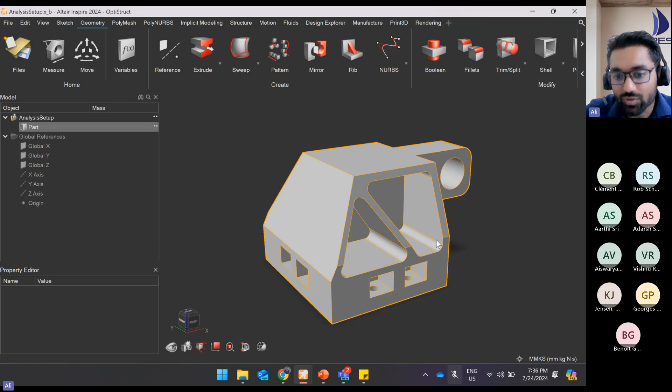And that might take a lot of time to go back and forth. So within Inspire, you have a few tools wherein you can play around with the geometry. Here I have the geometry tool on top, as you can see. We have various operations that you have in your traditional CAD interface, and you can use these to simplify your model. So here, as Ben mentioned, this is a part of an aeroplane, and we need to simulate this and even check it for optimization.

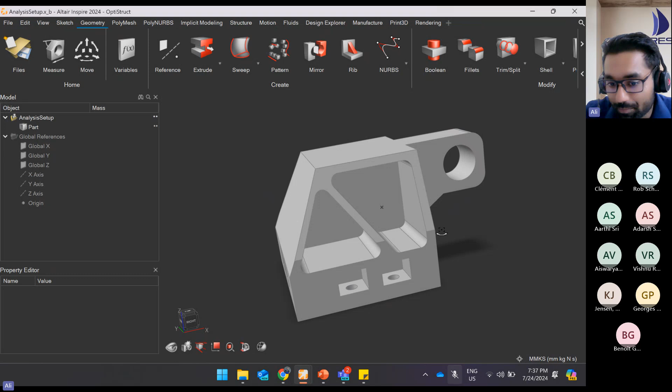And the initial part will be to just simplify the geometry. The reason we simplify the geometry for optimization is so that we have a full packaging space wherein the software can go around and play with numbers and show us what will be the optimal shape. As you might see initially, it's made for subtractive kind of manufacturing, wherein milling operation is used and drilling operation is used. Now let me go ahead and do some simplification.

I just go in here. We have something called tool simplify. I click on it and we have multiple options to simplify. Do I have an imprint that I want to remove? All the rounds, holes, or I just want to plug the holes up.

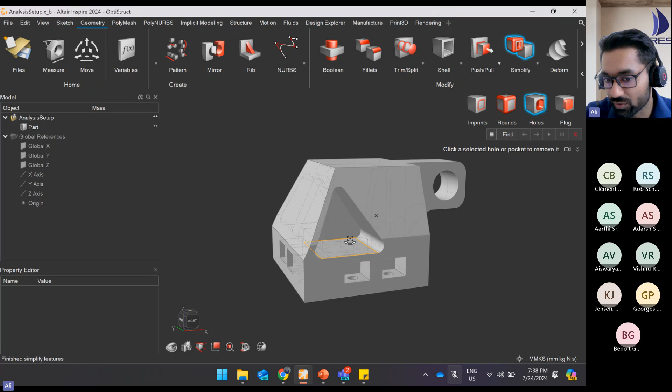In my case, currently I'm just looking to fill up these holes. So I click on holes, and the software will go around the geometry and find all the holes it can fill. Let's say I do not want to fill those holes - I just remove them and select manually. I select these holes, click OK, and it will go ahead and fill those holes for me. That easy it is to just go in and simplify the geometry.

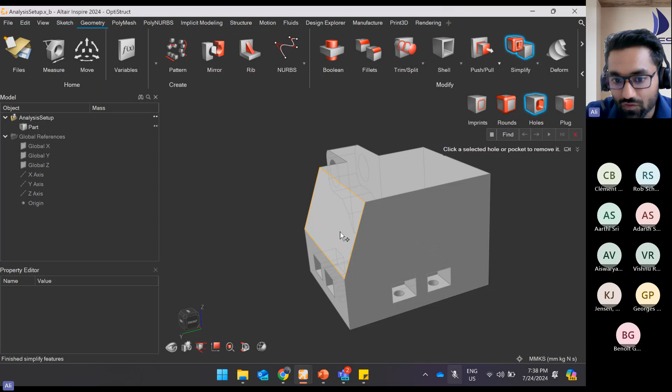Again, there are some more simplifications which we require over here. So I click in here, it will become flat. Let's say I want flat over here as well. The software is quite smart in terms of identifying what I'm looking for. Right now it's a square block, a cuboid. So here I can play around, and the software can give me an optimized shape.

Right now, once we have the simplification, we can go ahead and set up our solve for optimization. So in that case, I just need to change the toolbar from geometry to the structural toolbar that you see over here. So here we have the structure tool - you come in here and have multiple ways to set up different kinds of boundary conditions.

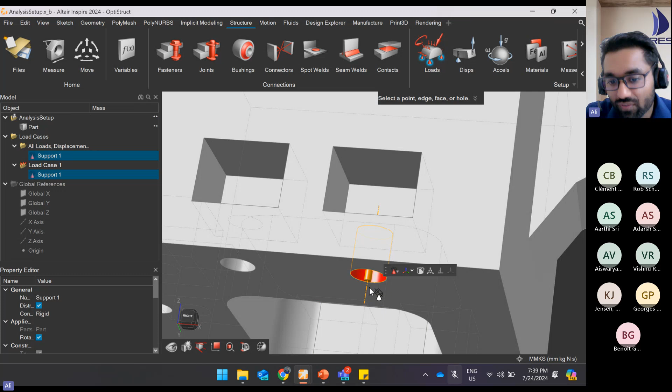But before I move on to optimization, there's something to consider - if you're optimizing a part, the software might also optimize the areas or regions where we have the boundary condition. What I mean is, let's say I have a cylindrical support at the bottom. If the software simplifies, it might remove material from one side and not from another. So I need to let the software know these are the regions where it should not remove any material.

Again, in that case, I don't need to go back to my CAD team. Within simplification, we have something called partition. It will find all the areas wherein I can make the partition. Let's say I don't want all of these - I just want a few. I select those cylinders.

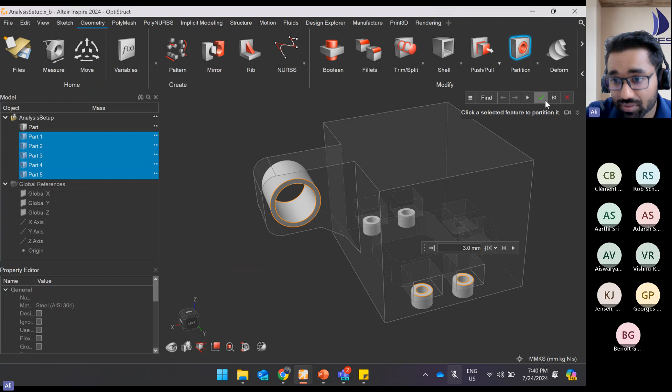And at the back side as well, just go in here and select these. And click the play button. It will show me what's the thickness that I require. Let's say 3 mm is good. I just click check mark and it will divide these components from the main component. So I can see in the structure tree, the division did happen, right?

Now I can just let the software know. So see, this is my design space. You're only bound to play around with the material only in these regions. Please don't do anything for these regions because these are where my boundary conditions are. Now we are good to start with our setup of the model.

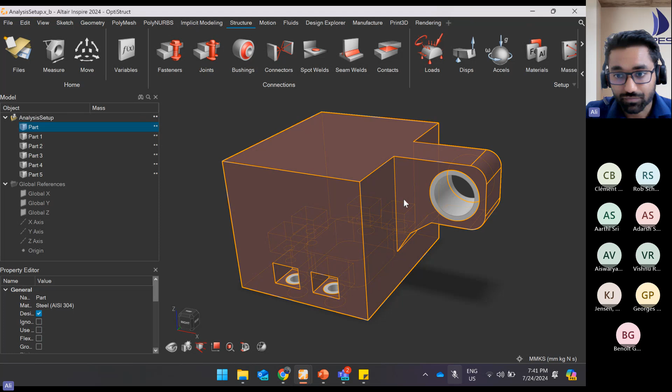Initially, I'll have some supports. Let's say I have some supports at the bottom. I just insert these supports on the 4 holes in here. And I can just move out of the tool. Right. This is the one load case. Let's say I want to have one other load case and generate another load case and also copy these supports in that very load case.

Right. Now we need to insert some kind of forces. Let's say I just want to have a force over here. Just let's say 1000 Newton, or let's say 2000 Newton for now, and click OK. This was for the load case 3rd. Let's say for load case 2 also, I'll require something in the Z direction. Let me make it 4000. Enter.

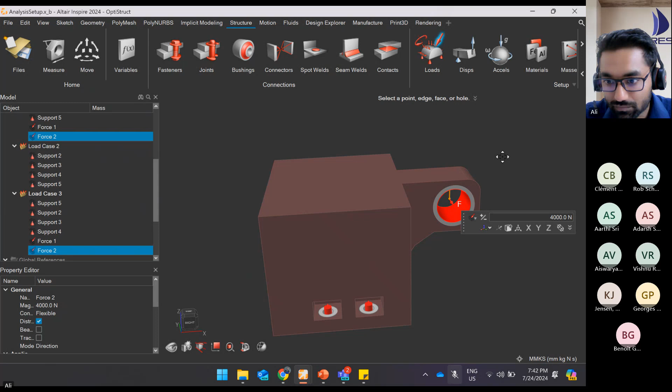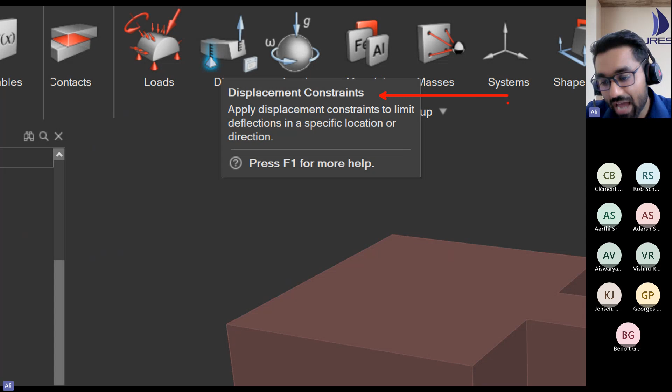Now this is the basic setup with which we are good to proceed with the optimization, right? Now within the optimization framework, we have multiple constraints that we can apply, right? So for example, we can apply something called displacement constraints, in which an edge or a surface can be mentioned that this surface shouldn't displace by this much amount. We can give a boundation for that. Right. Let's say as of now, I'm not requiring that.

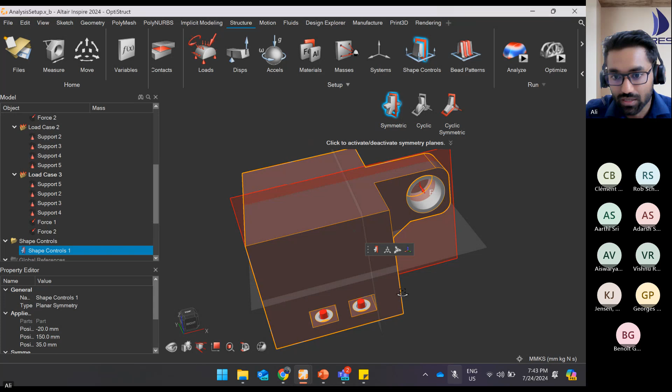I require that the part should be symmetrical in nature. So I have those kind of constraints in here. I just select the symmetry. Again, now in symmetry, we have different kinds of symmetry. We want simple symmetry or cyclic symmetry, right? Now let's say I just want symmetry. I just select the body and I can just remove the planes which I do not want the symmetry about. So once I'm good, now I can move to the next step.

As you might see, the workflow here is quite simple. We are moving from left to right, using the things which are required and using the tools that suffice our need, and we're good to move on to the next step. Now comes different kinds of optimization for manufacturing, right? So we have something called shape controls for different kinds of manufacturing processes. So depending upon what I'm looking for, I can optimize the solve accordingly. Let's say the manufacturing process that I'm using is single draw. I can have that kind of a process and optimization for that.

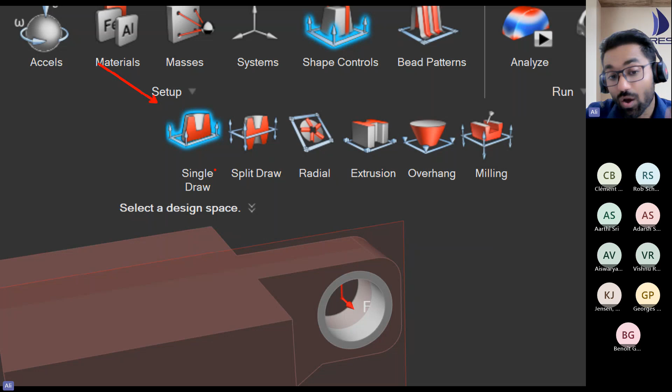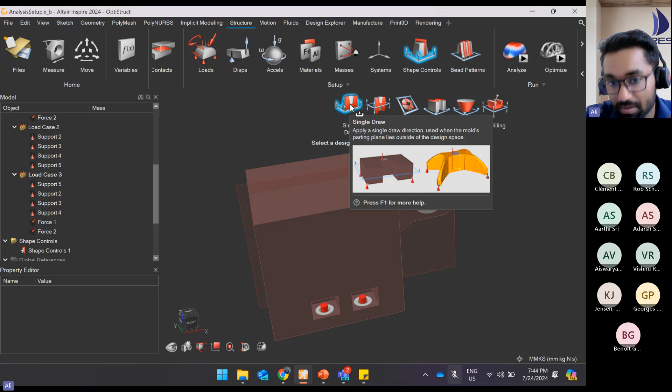If you are doing split draw, radial extrusion, overhang, meaning something which we are 3D printing, or if you are using a milling kind of operation for manufacturing. So depending upon what we are intending to have as a manufacturing process, I can select in here and the software will make sure that the design that will be getting out is able to get manufactured by that very process. I will just apply single draw and I just select the draw direction. And once I'm good, I can just move on, right?

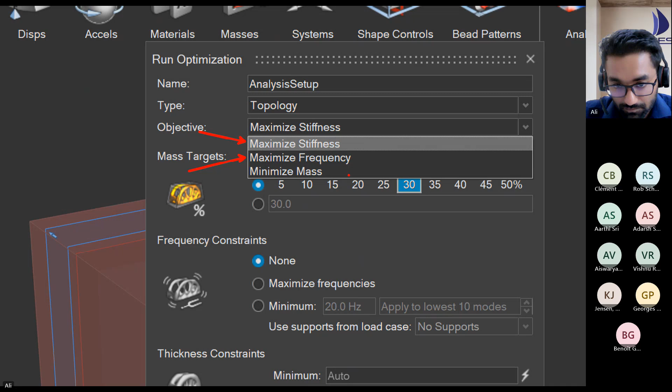Now coming on to running the optimization. So I just click on optimization in here. And we have different kinds of things to play around here as well. First of all, I can name the solve. Now, what's the objective? So we can have different objectives depending upon which the software can have the optimization. So basically there are three. One is to maximize the stiffness. Second is to maximize the frequency. And the third one is to minimize the mass. Depending upon what option we select from here, we'll have different kinds of breakdown in the below tables.

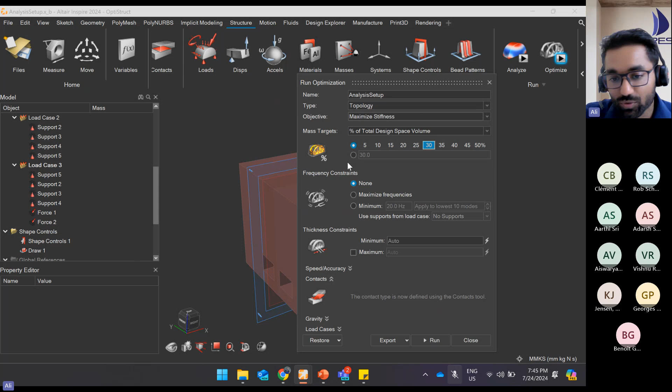For example, if I just want to maximize the stiffness, I need to set the mass target that I have in my mind for the output model that I'm looking at. Again, if you want to maximize the frequency, you can have that kind of support as well. Again, you can have both the load cases or just one load case as well. And in case you are looking to minimize the mass, you can just give a minimum safety factor. Let's say 5 is the safety factor that I'm looking for. Below this, it shouldn't go. Right. So depending upon what's my need or requirement in terms of manufacturability, in terms of objective, I can apply before the solve and we are good to go.

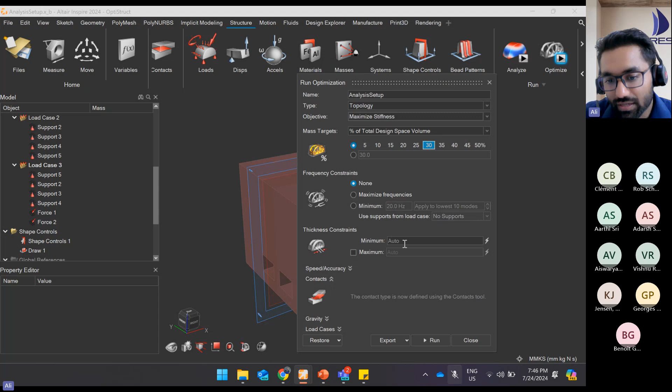For the initial solve, let me select maximize stiffness. So if I just click in here, let's say 30 is good. Now, again, I can have some kind of frequency constraints if I want to. Even the thickness can be varied, right? So if I want a minimum thickness to a certain point, although the software will automatically calculate based on the model, if I just want to input anything, I'm really allowed to do so. For this session, we are running just a faster simulation.

And let's select both the load cases for now. Now, once we are good, you can just click on run. And just a second, one of the load cases, we haven't entered the force. Let me move it to 2. And we are good to run now.

Right. Now the optimization is going around and it will see what are the load paths, right? Where is the path wherein the load is carried, and it will try to have mass in those very sites and remove the mass from the region where there isn't any load path.

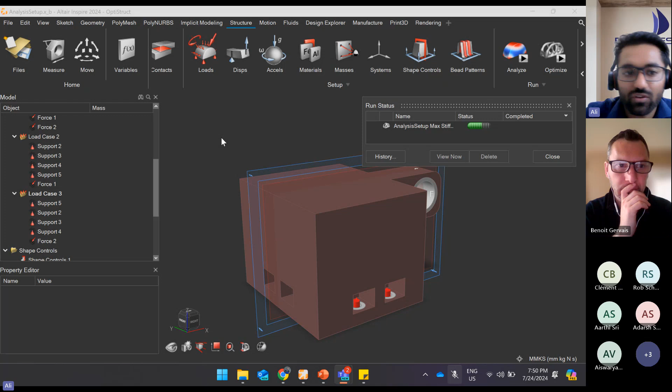Once you make some changes in the geometry in Inspire, you are free to save that geometry as well. Let's say you made the changes and you want to send it across to your design team for making the same changes in their CAD as well. So you can save the geometry as you can see in here. You can transmit the CAD file using Parasolid, STEP, whichever way you want. Right? Does that answer your question, Jensen?

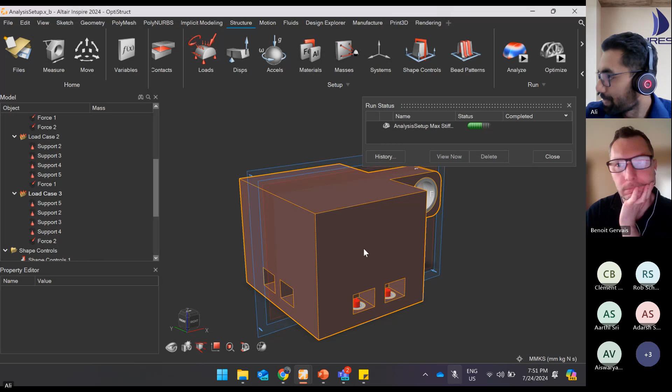Yeah, I think maybe some of the users are muted, so I think that's fine, Ali. I think that answers the question. I got it. I got it. Yeah, yeah. So let me take you to the model that I've already solved for you, right? Ali, we have another question. We have another question.

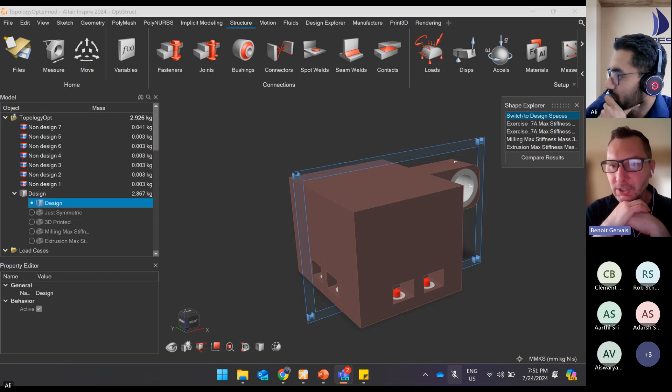Yeah, the question is, when setting a minimum thickness, if an unforeseen load is newly placed halfway along the part, such as this hinge arm example, how best to reanalyze or foresee acceptable deformation from a load? Just a second, I'm checking the question.

So I think what he's asking, Ali, is let's say you did an analysis on that part, and then you needed to reapply another load on that hinge that was not predicted. Would you be able to reanalyze or re-optimize that after you've gotten the result?

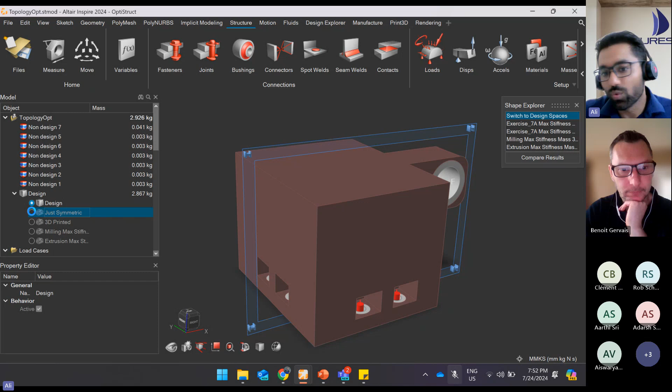Yeah, so once you enter certain conditions, the design will be created based on those conditions, right? Let's say for this, I've just applied symmetric loading. I haven't applied any kind of manufacturing constraints, and this is the part that I have. Now, I just want to go back and play around with certain things. I freely can do so, right? So I can just come back to the design. Now I can make the changes.

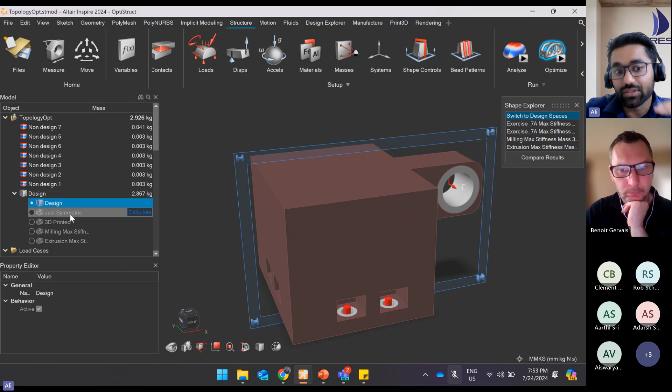Let's say you want to change the loading condition. You want to change the thickness. You're freely allowed to do it from here. So you have multiple design studies that are going around side by side, right? So you have all the studies that you can compare side by side and see what kind of results you are getting, right? So it's not that once you have selected and moved forward, now you cannot move backward. That's not the case.

I've analyzed this component, just one component, I've just gone back, made certain changes in the load cases, and again have reanalyzed. Right. Hope that answers your question. So moving on, if you have any questions, please feel free to shoot them out in the Q&A session, and we'll take it up from there.

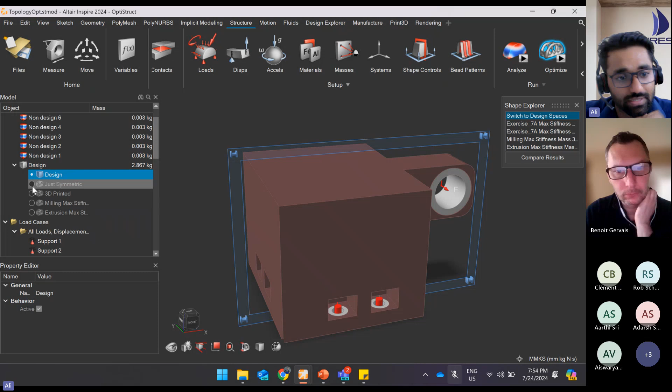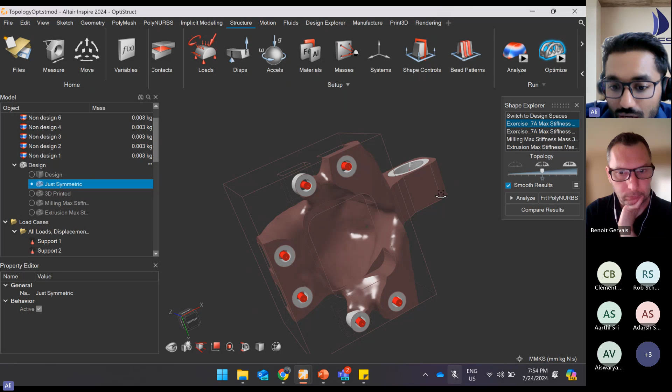So we performed the analysis. I did it just some time before this event. So I've done a few of the results so that we can talk about the results, right? So I've just applied the symmetric kind of loading, no manufacturing constraint in that case. This is the kind of geometry that we get out. I can see how it has optimized. I can see the areas wherein there is no load path. It has removed the material.

Even in here, we have the option to play around slightly, right? Let's say I want it a bit thicker. I can move the slider, which we have over here, to decrease or increase the thickness. Can go it down. So I can just slide it over here. And now in here as well, we have multiple options, right? So we can analyze how this part is behaving with our new set of conditions, new set of geometry.

I need not go back again and do the boundary conditions and all. I just click on analyze. It will take this geometry and go for the solve. That's it, right? I need not do repetitive tasks. It will keep on running. I can just close it and play around with others.

Hi, this is Rob. Just a question there then. So with what you've just done there, you've chosen this configuration of the topology. And if you want to see what the actual stresses and displacements and everything are for that, that's what you just did there with clicking analyze. Is that correct? Totally correct. That's what I did. All right. That's a lot more convenient than doing it in HyperMesh.

Yeah. If you have access to HyperMesh, most probably you'll have access to Inspire. Yeah, I have it. I've been doing this type of thing with HyperMesh for years, but I haven't really explored Inspire that much.

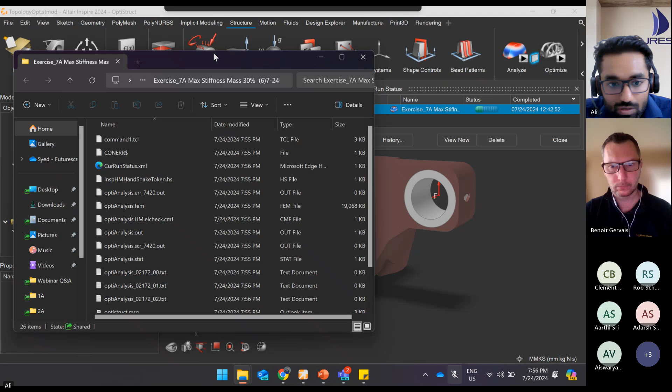So if you just open this run folder, you can see you get all the files that you can move to HyperMesh directly, right? You have the FEM file, you have the H3D file. So inside Inspire, under the hood, it's OptiStruct that is running. It's the same solver that you use with your HyperMesh or HyperWorks. So you can use these results, even this CAD model, take it to HyperMesh, play around a bit more and get much more accurate results over there. Right. I guess that answers your question. Yeah, thank you. You're welcome.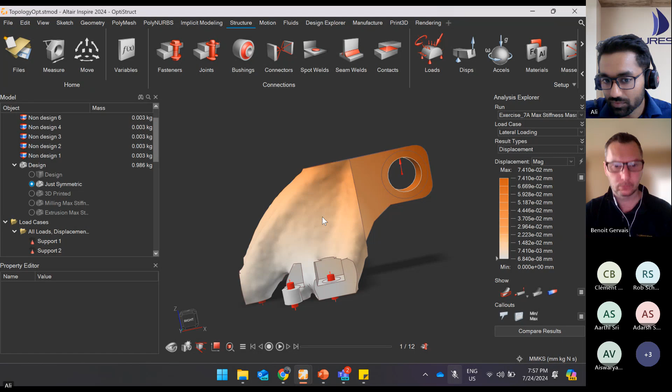So the run that we just performed is completed now. We have the displacements for vertical loading as well as for lateral loading. We have displacement, factor of safety, and all those kinds of things over here. Right. Even once we have the results, I'll just show you. For example, let's move to 3D print. As of now, there is no solve for it. Let's go to optimize, and I'll analyze for this as well.

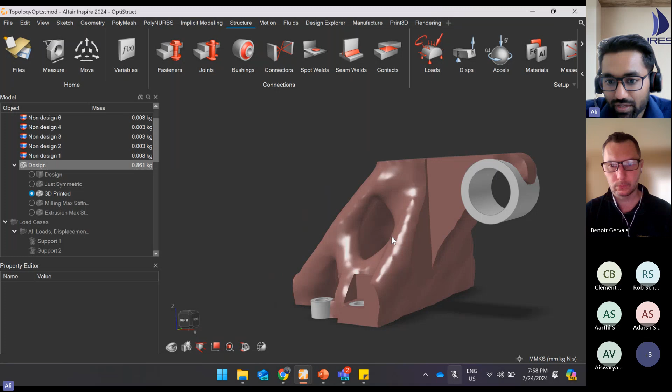So this geometry that we have got out, this is for a 3D print kind of optimization. You might see the traditional way wouldn't be able to manufacture this part like this. So we can run an optimization for this kind of solid as well. Once we run the optimization, we can again have the analysis for that, and even compare side by side with different optimized results to see where we are having maximum factor of safety, minimum mass, and all those kinds of things. So you can intuitively check all things in just one window. Once it is done, I'll show you that as well.

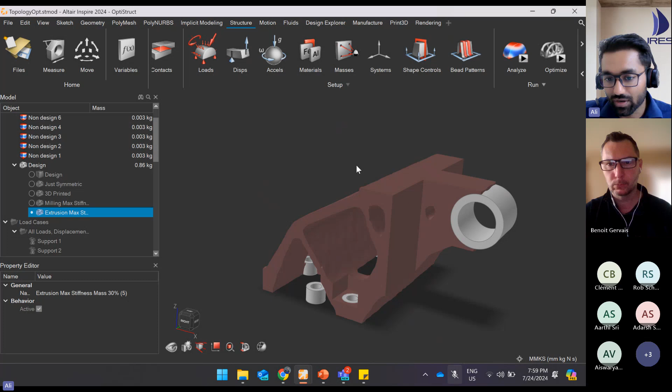I've also run one for extrusion. So as you might understand, for the extrusion, this is something that we'll be looking at, and when it will be extruded, this kind of geometry is what the software has come up with. So the software knows, depending upon the kind of analysis that you're running, what kind of optimization will suit the manufacturing process, and based on that, it will try to optimize for that very condition. Right.

Now it's running. In the meantime, if you have any questions, please feel free to ask.

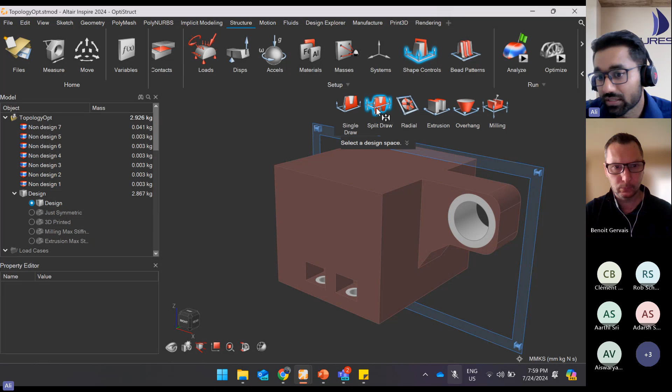So if I just show you the different conditions that you get. For example, if you have a single draw or split draw, you can just select the plane. If you have, let's say, extrusion, again, you need to select the plane through which the extrusion is going to take place. Now, if you are 3D printing, you can give an angle for overhang, so above that angle, the overhang shouldn't be there. And in case of milling, there is something called access radius and access depth. So these are the conditions based on which the optimization gets performed. Right.

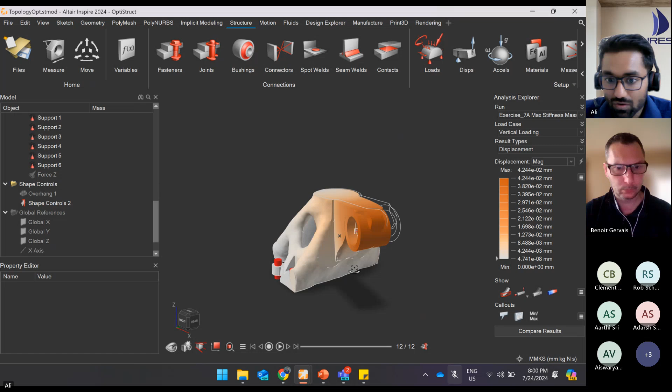Now we have the results for the solve. You just come back and have the results for the one that we just performed for 3D print. I can again have all kinds of results in here. See where the displacement is maximum. So as inferred, here will be the maximum displacements. I can just slide the slider and even see how it's behaving.

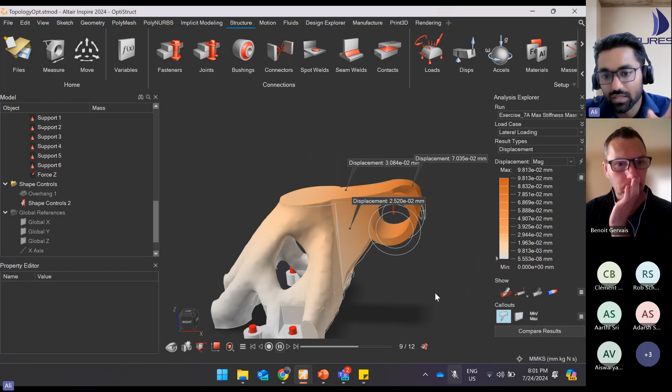This is vertical loading. Let's say I go for lateral loading. So this is how the part will behave. I can have callouts for different regions. So for example, if I just want the displacement at certain points, I can point them out. Let's interpolate the results. So I can have this kind of results as well, where as the part is moving, the results will change as per the movement.

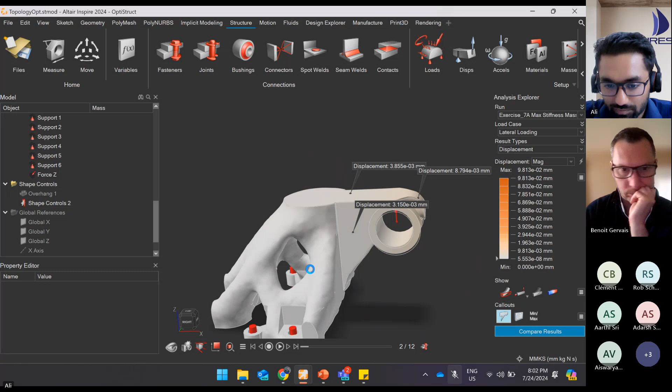Now comes the main part, that's called compare results, right? So I just click on compare results. It will go ahead and compare the results that I already have. Right? It's just comparing now. In between, if you have any questions again, please feel free to ask.

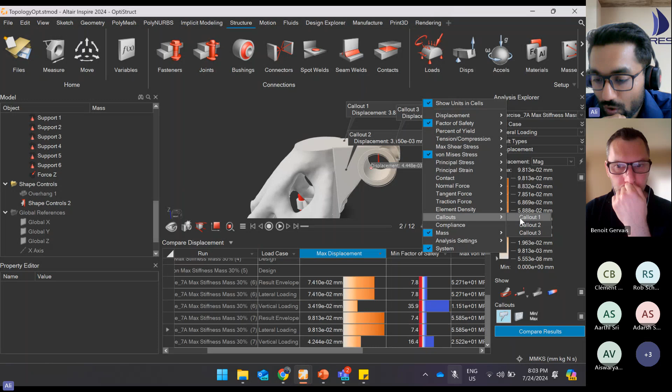Right. So here are the results for all the runs that we have. For all the runs, what was the original case, what was the maximum displacement in that very case, the mass, for the different runs that I have performed. Right. Here, maximum mass. I can even enter my own kind of results. Let's say I just want factor of safety: what's the minimum factor of safety in each of these cases? What's the von Mises stress? Even for the callouts 1, 2, 3, we want to compare the results.

So we have all these results and we can now compare side by side. As you might see, the bottom one has the minimum mass, and we can see the results live over here. I can even copy this and take it outside as well. Let's say I want to present it in a presentation or something of that sort. I'm freely allowed to do so as well. Right.

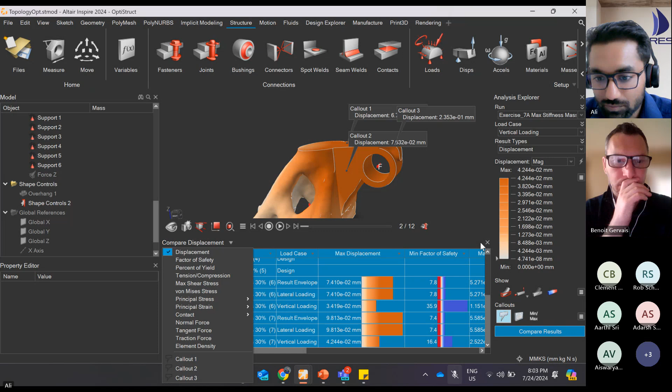Now, we have completed this. We also have something called a report. I just click on the report and give a name to it. It will go ahead and create the report for the solves that you have done, and that will be handy for you. So it will automatically go ahead; as you might see in here, it's checking the component, taking snapshots of the components with different kinds of results. It's all automatic. I'm not doing anything. It's automatically creating a report for me.

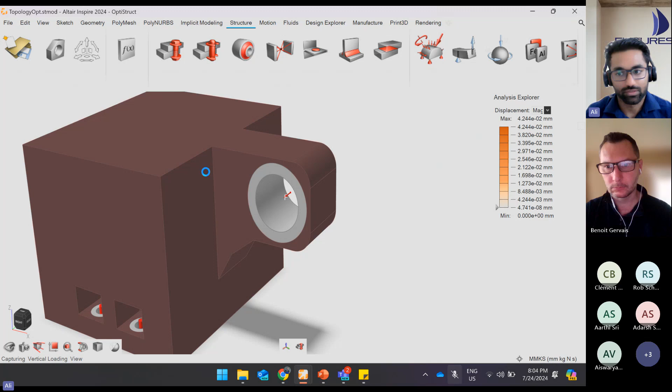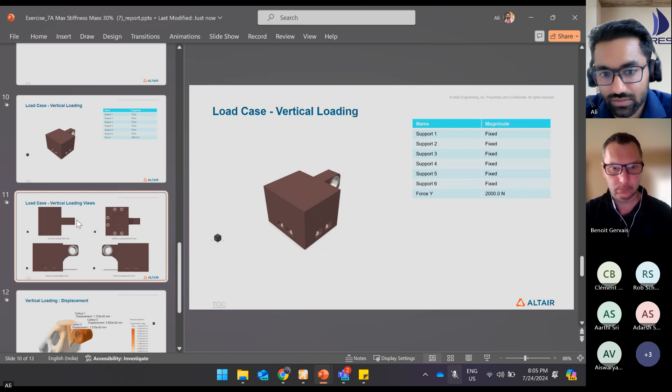Right? So I have the report. Now let me open that for you. Right? So we have all the information about our model. Hide this. Right. So all the information of the different parts in the model, what kind of supports we have inserted, what the loading conditions are, and then the different displacements and all those kinds of things.

So this is a very cool feature if you are looking to present something and you just want to quickly run and create a report. This will become really handy, right?

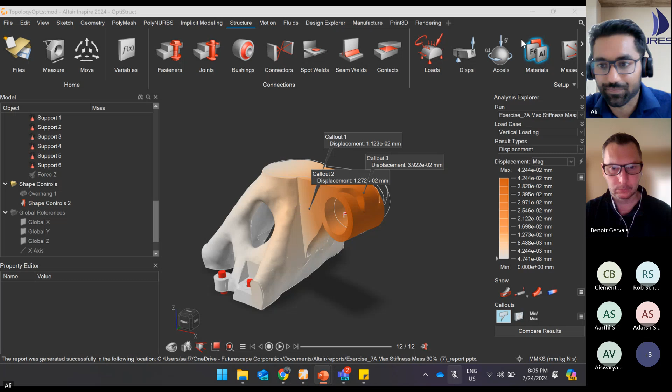Now we'll open up for questions. So that's the majority of what I wanted to show today regarding manufacturability, the different kinds of results we have, and all the kinds of controls that you have within Inspire. Now we'll open up for questions. Any questions that you have, please feel free to ask. You can unmute yourself and ask your questions as well.

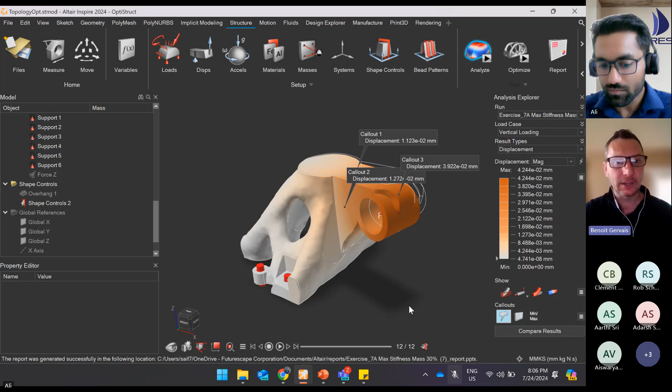Yeah, and I just hope you don't mind me adding this, Ali. I just wanted to add to this presentation, to keep in mind everyone, that Ali has demonstrated a subset of the capabilities of the Inspire tools. So this is really just the design workflow. The idea behind this workflow is that if you had a CAD system, such as SolidWorks or Inventor, and you wanted to come up with a very innovative concept that was much higher performing than more traditional human design, you could use this to come up with initial concepts of high performing shapes using all the engineering inputs prior to actually committing to detailed design.

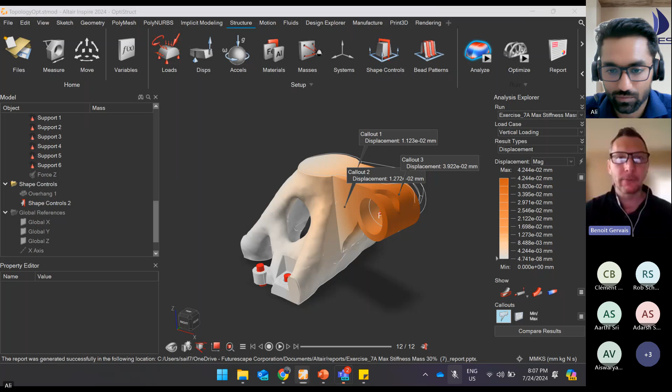There are other workflows in Inspire. Notice that there is full manufacturing simulation available in Inspire, but we're just demonstrating the initial design optimization workflow. So if you guys have any questions about the Inspire workflow we showed today or any of the other Inspire tool sets which we have not presented, the floor is open for those types of questions. Yep. And does anyone have any questions for Ali?

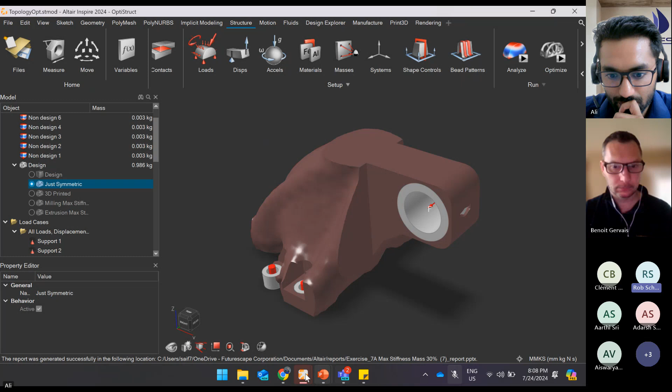Just maybe one. The optimization that you just did, you have different ways you can set that up. You could minimize mass based on, say, a deformation constraint, or I think what you did there was maximize stiffness and tell it a percentage of the volume to keep. Is that how you did that? Now, can you do another type of analysis? Say you had a nonlinear buckling strength requirement for a part, could you put buckling strength as a constraint and optimize geometry to meet something like that? Is it restricted to a linear static analysis type of scenario, or can it support nonlinear analysis?

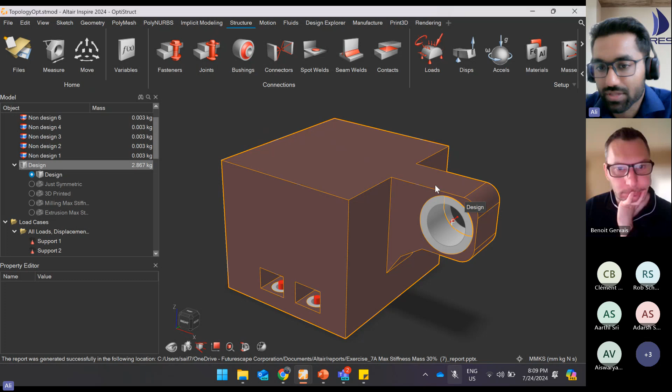Yeah. Thank you for that question. That's a good question, Rob. So Rob, as of now, Inspire is limited to static structural kind of analysis, right? Now you have a heavier package that we just discussed called HyperWorks. Therein you have the capabilities to play around with nonlinear analysis as well. Herein it will be mostly linear analysis that we'll be dealing with. Okay, thanks.

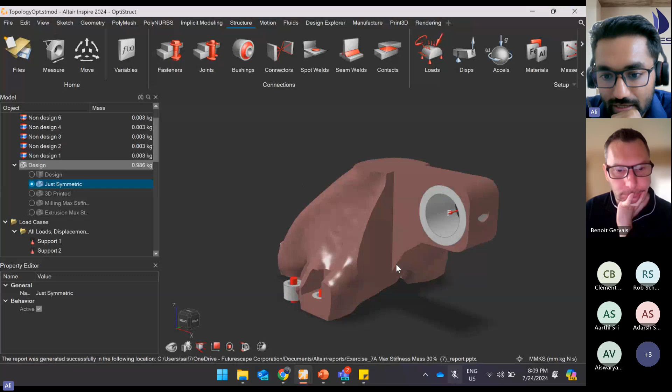As we do not have any questions, if you have, please feel free to ask. I just want to show one more cool thing out here. Once you're good with the design, you might come up with a question: what now? So you have the design, what to do next? Let's say you have this 3D printed design and you ask me, Ali, how do we get it out from Inspire? This doesn't look like a finished CAD model, and you might have difficulty creating this kind of a model in a CAD software.

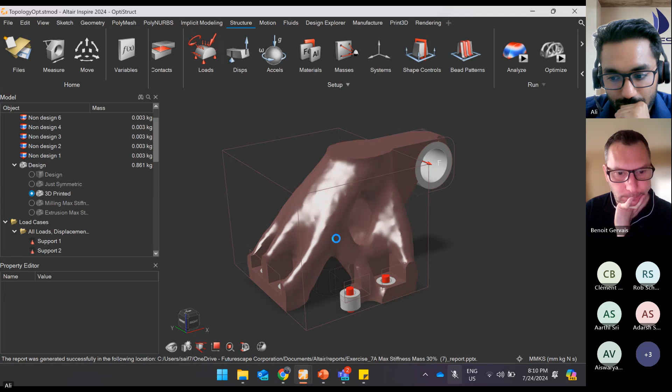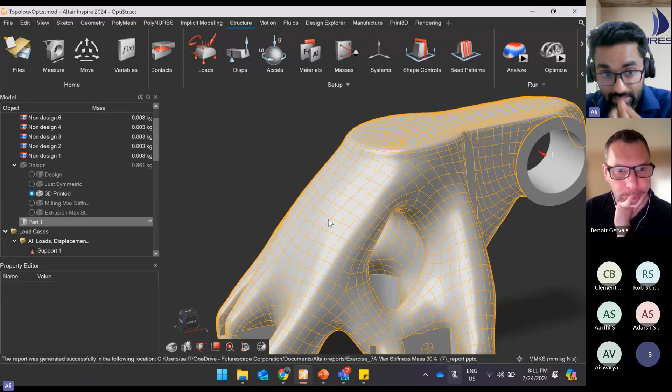So within the Inspire interface, you have something called PolyNURBS. I just click over here, on fit PolyNURBS. It will go ahead and create an STL file for me, wherein I can play around with the geometry using PolyNURBS. I've just clicked it. It's processing right now. Okay, so you might see it has already generated an STL file. Now you might see this surface is much smoother than what we had. It's generated a file which can be saved as an STL file. I can take it out and use it directly with my printer software.

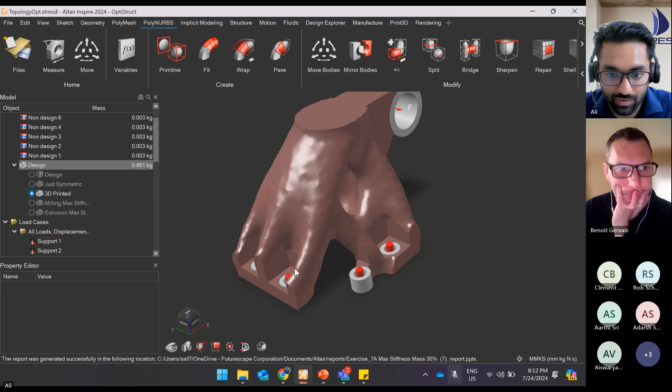Even if I just want to manipulate the CAD over here, I can go back a bit and create my own. So I go into PolyNURBS and now I can start wrapping around. Herein I have the flexibility of creating my own design and manipulating it as well. For example, I click on here and I can take things from here to here. It will create a solid out of it. Just go to fit. Wrap. Select the surface and I can create like this. In this way, I can move forward, and in the end I can generate a geometry much more sleek and clean.

Even in the end, if I want to play around a bit, I have the flexibility to do that as well. For example, this is a PolyNURBS created out of the same solid. I just go in here and let's say I want to move this slightly outside, or rotate it.

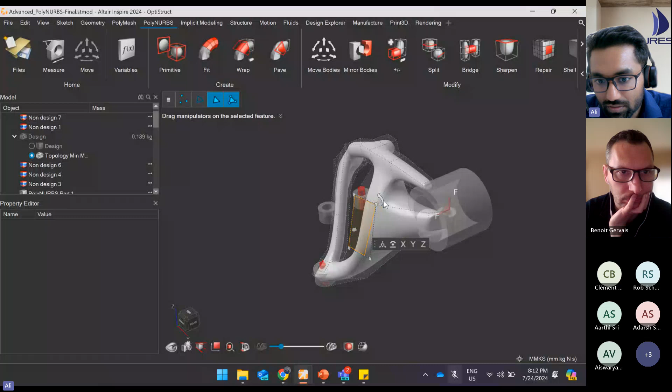So you have that kind of flexibility as well. In the end, you are getting a proper CAD model that can be exported as an STL file. I can go ahead and analyze this component as well, which I've created using PolyNURBS.

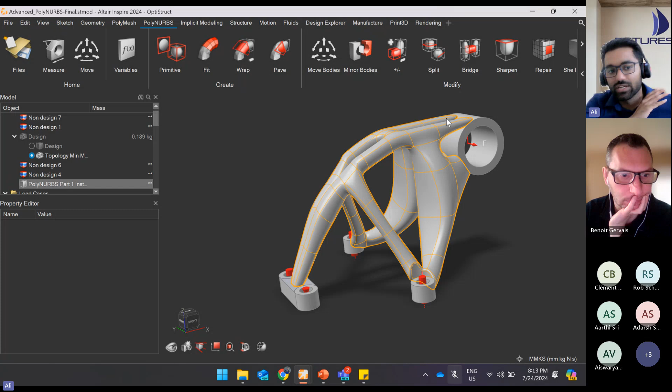You have an end-to-end solution. So I just had the initial part, and I went over it. Initially I just had something like this. Let me open the presentation.

So initially we had something like this, right? We go ahead and try to do some defeaturing, wherein we were able to remove these holes so that the software is able to find a good amount of packaging space wherein it can play around and give us the proper optimized result, right?

Then we got in and, depending upon our manufacturing constraints, we created an ideal shape. We played around with different shapes. Once we finalize the shape, we check the performance of different shapes. Once we are good, we create, using PolyNURBS, a geometry which is good to take outside.

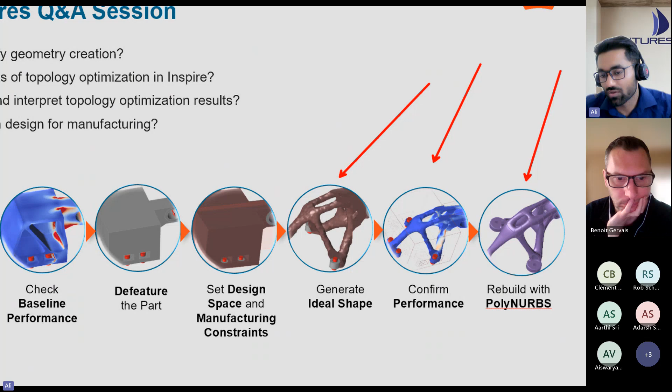We can use it for 3D printing, or we can give it to our design people as well. So we are good for manufacturing. You have an end-to-end workflow in here, where you just start from the very basic model that you already have, and you get the final results out of it in terms of the optimized result.

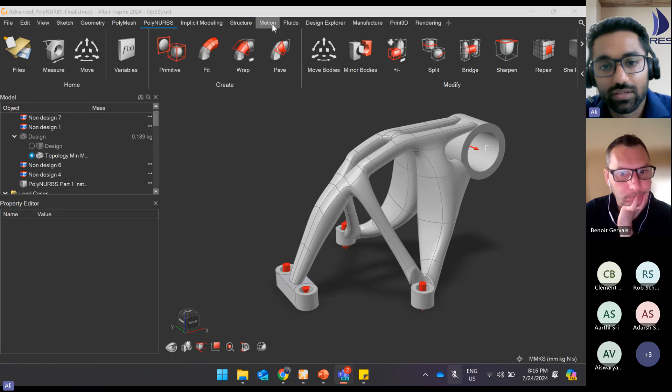So Clement, herein I just showed you a feature wherein we just have the structure, right? This Inspire is a really powerful package in here. You get a lot of things, such as, let's say, you have a moving part and you want to optimize that for a moving part in here.

So we have something called Inspire Motion, where you can open a model with different moving parts and optimize that, right? Let me show you something real quick, I'll just go to motion. And something which is already optimized.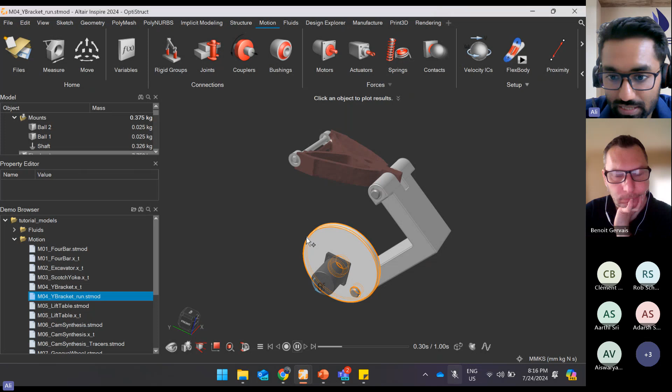All right, so herein you can see, this was a solve wherein there was a motion, right? So you were having a kind of motion in here. And based on this motion, the software will automatically check what forces are acting on the geometry.

So the initial geometry, if I just show you, this was the initial geometry. The software was able to find what forces are there. And based on those forces, I can go ahead and optimize. Not just that, I can see what forces we are getting on the motors and all.

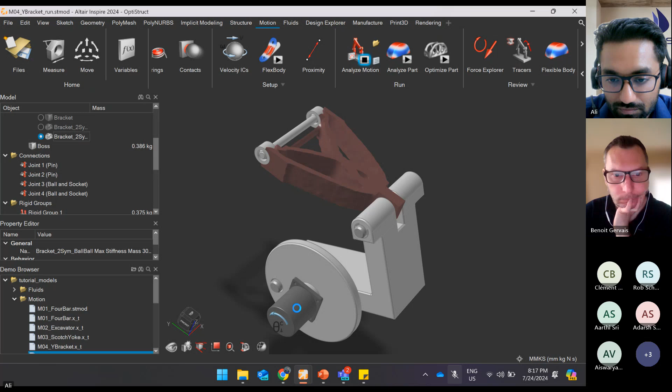So if I just run the analysis in here, just real quick, we'll be preparing, just click in here and see different kinds of results out of it. So what's the torque that the motor will require to move this kind of motion, right? You can see the speed, how it's varying, and all those kinds of things.

So it's not just structures, you have motion capabilities as well, wherein there is a moving part, you do not know what kind of forces there are, and the software will find it for you.

Now, going a step further, you also have something called Print3D, right? Let's say you have optimized a part for 3D printing, and now you want to see how the part will be printed. So we have something called Print3D, wherein you can get a result. I'll just open that for you as well. Just give me a moment.

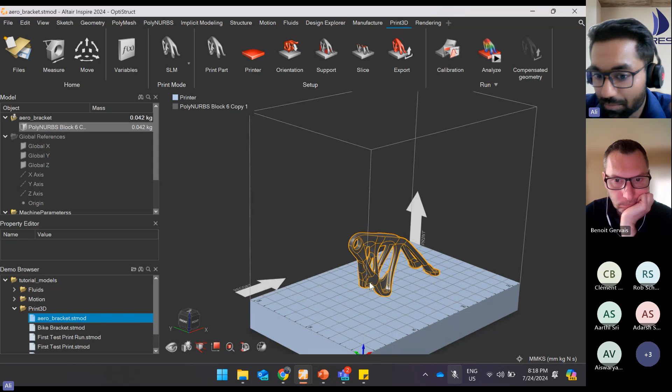So for example, this is the part that we generated, and we want to see what kind of problems can come while 3D printing. Will there be any kind of deformation, any of those things? I have those capabilities in here as well. I can see and manipulate different kinds of supports, and get the file for those supports as well.

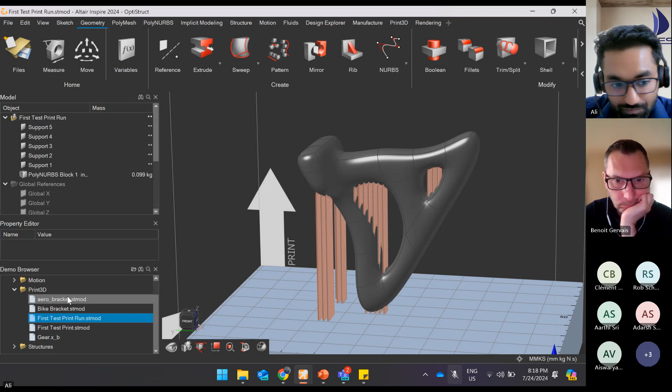So you do not just have the structures, you have the motion capabilities within Inspire. We've recently added fluid capabilities as well. This is just an initial fluid analysis that you can do. So it's just one package wherein you can have different kinds of things.

Even post creating your design, let's say you have an end user to whom the aesthetic also matters. In that case, you want a rendered image out of this, so you have Inspire Render as well. Within one interface, you have different things to play around with, so you can just go ahead and render your component too.

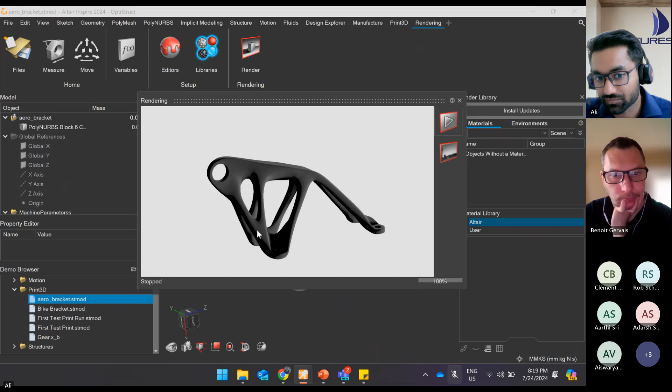So end to end, you can do the simulation. You started with the geometry, went through different kinds of optimization. Once you got that optimization, if you have a motion solve, you can see what forces are required by the motor so you can select the motor appropriately.

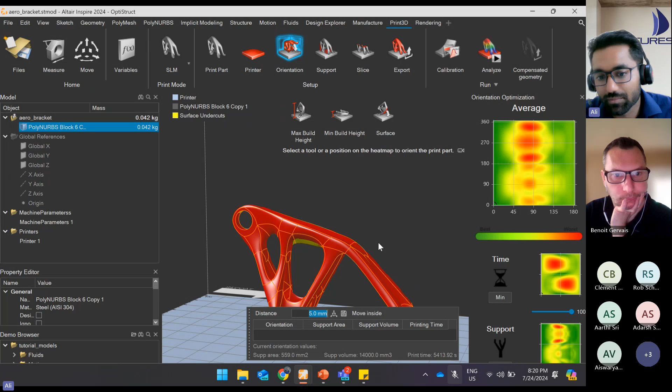Once you're good with that, you can print it and see what problems can occur, and define different kinds of supports and orientations, all within the same software. We just showed one aspect of Inspire, because it would be a really lengthy and possibly complicated session, so we kept it simple for structures for now. In future we'll definitely have webinars on these other topics as well.

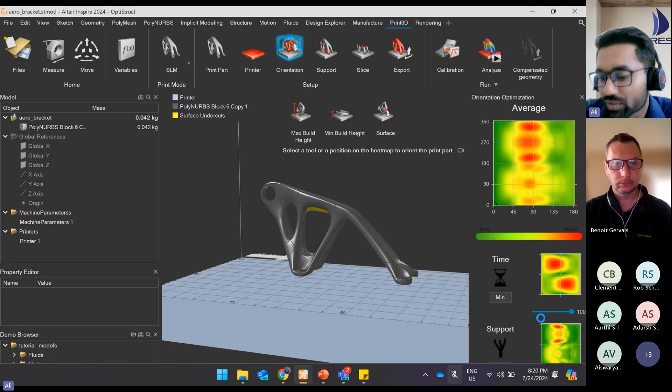As you see, I've currently opened up the orientation toolbar here, so I can see which angles will take minimal time, when I'll require maximum support, all those kinds of things. It's just one package, but you get an ample amount of simulation capabilities, which might fulfill a lot of your needs.

That was a really big answer. So in short, Inspire can do simplification of geometry, design for manufacturability, motion simulation as well, and even rendered images out of it. Sorry for the long answer, but that's what Inspire can do. I guess that answers your question.

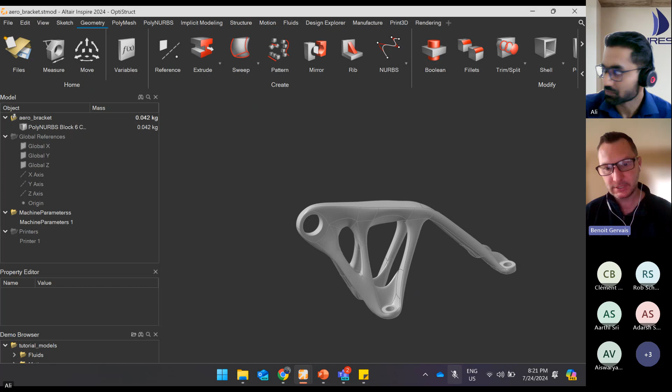Yeah, thanks Ali, that was a comprehensive answer. The big thing I wanted to add is what has always distinguished Inspire from more simple generative design: one, the algorithms are extremely mature with the Altair line, because Altair's had their solver for topology since the 90s, so it's the most mature with the most accurate results. Secondly, it has many additional features including manufacturability, which a lot of other generative design packages do not do very well. So you can both do optimization for shape controls with manufacturability, along with all the different types of simulation in the same environment. I hope that answers the question.

Just one more thing to add: the solve that you get out of Inspire can also be taken to higher level software such as HyperMesh or Nastran, if you want. So you have the solve result that you can further analyze and get much more accurate results. That's also one of the features of Inspire.